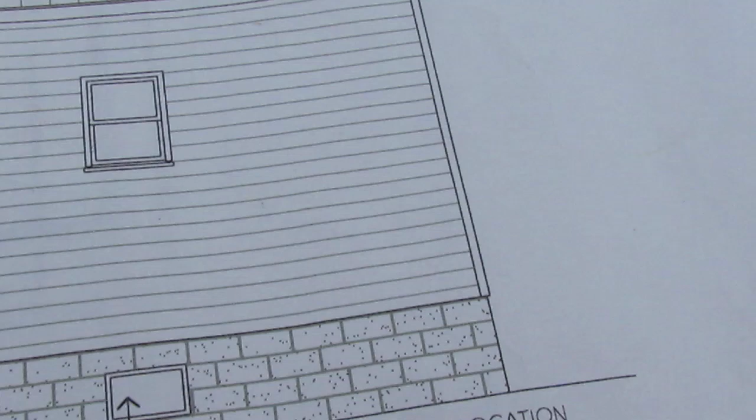Okay, we're going to video this little plan here. This is a house that I just built in Southwest Virginia. It's very simple. So there's your rear. That's what it looks like when you're standing looking at the rear of it.

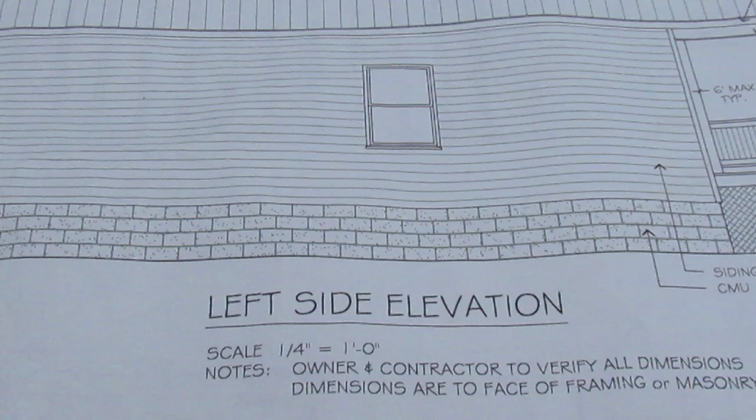Here's what it looks like when you're standing looking at the front of it. There's the left side elevation. If I can pull back and get that all in there. And then you got your right side elevation

right below it. And that's basically what the house is going to look like from the front, rear, sides. Looking at the floor plan here, real simple. Got a bedroom and a bathroom, and then a living room.

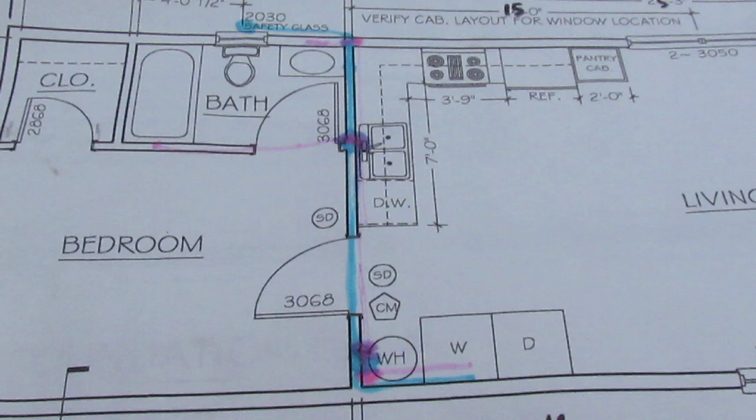This bedroom, I don't know if you can pick up the sizes on that or not, but it's supposed to be 13 foot 5 inches, but I had that wall moved out. So that wall there, that's where the sink is, has actually been moved out a foot. So I have 1 foot bigger on the bathroom and 1 foot bigger on the bedroom. I left the closet dimensions the same. I pulled the other foot off of the bathroom. So now I have a 5 foot by 9 foot bathroom.

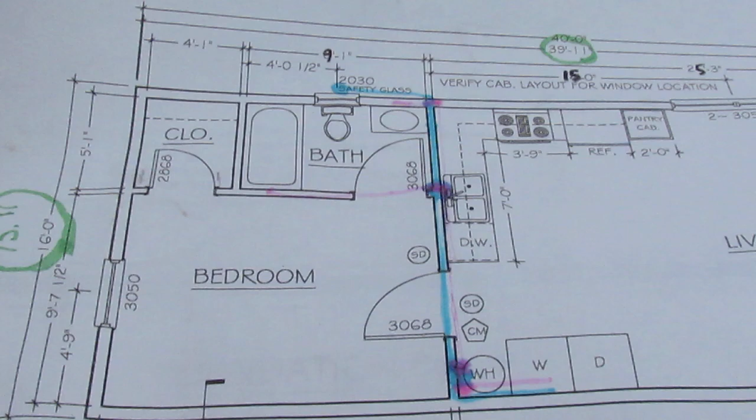Most bathrooms in a home are going to be, you know, that little bathroom that's in the hallway or something. The guest bath, I guess they call it. They're usually about that size. That gives you enough room to fit a 30-inch tub and have enough clearance there for the toilet, and then like a 24-inch vanity. I really wanted like a 32-inch vanity, and I wanted a little bit wider shower pan. So everything works out really good.

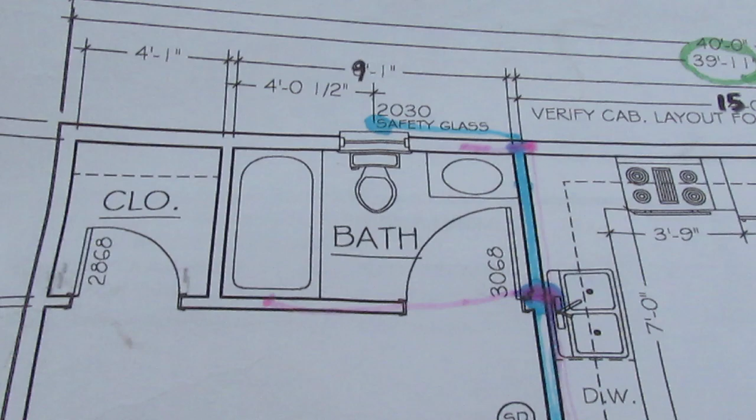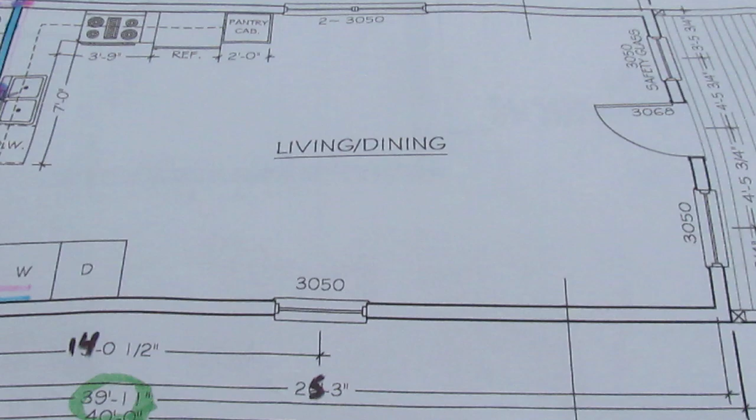You got to keep in mind that your toilet there has to be a certain amount of distance between it and the tub and it and the sink, and that's by code, but you're going to want it anyways because you got to get to your toilet. So everything else pretty much remained the same. You know, you got your regular kitchen there with your stove, and then a hot water heater, washer and dryer, and the rest of it's just a pretty simple living space.

So this thing is 16 feet wide and 40 foot in length with an 8 foot front patio. So the patio just comes right off the front of it, and the roof is very easy. I guess you can kind of see right here. There's the roof. That's how you want a roof, just like that. I believe that's a 5/12 pitch.

That's another thing that's required by code. So it's going to be different in different areas. Some might be steeper, some might be not quite so steep, and some you can pretty much do flat, you know. Depends on where you're at and how much snow you're going to get.

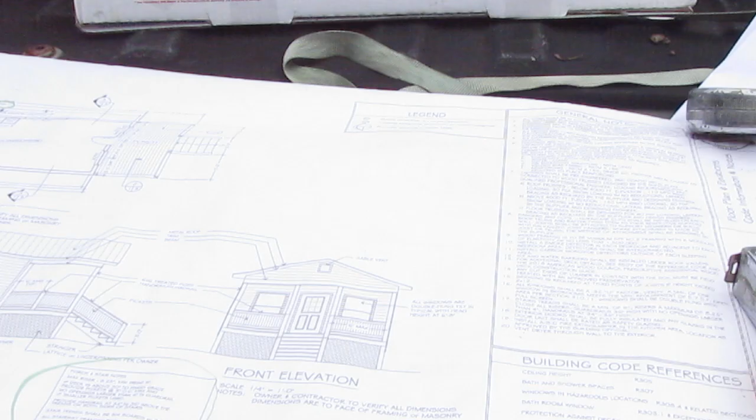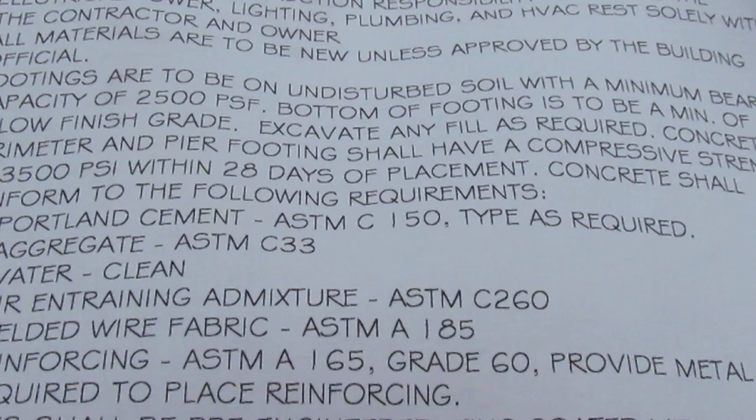So anyways, we're back over here now to the plan. I'm going to read through a couple of these general notes here. All work shall be in compliance with state and local codes. Reference building code is the current edition of the Virginia USBC and referenced 2018 Virginia Residential Code.

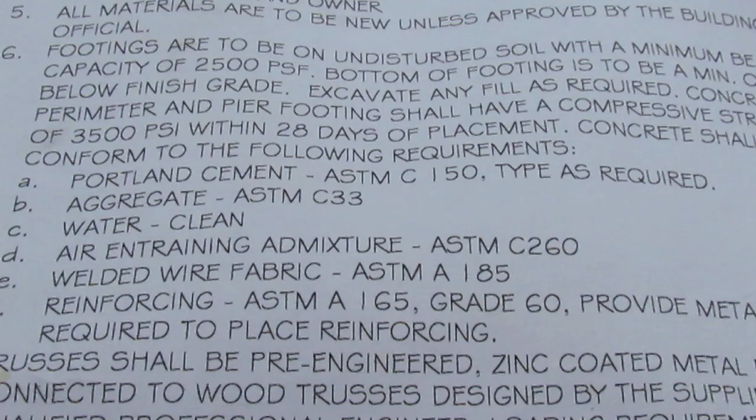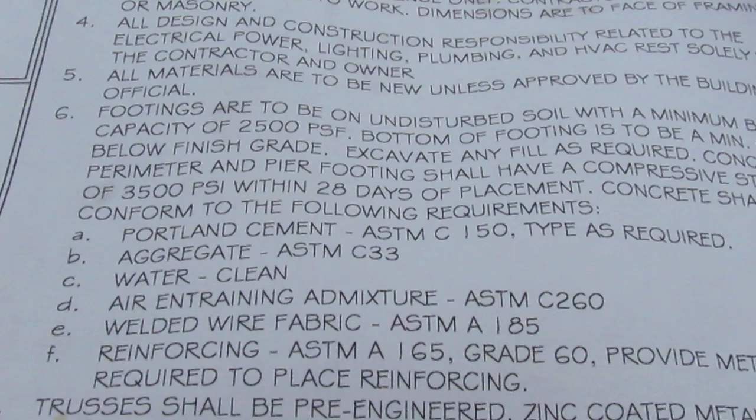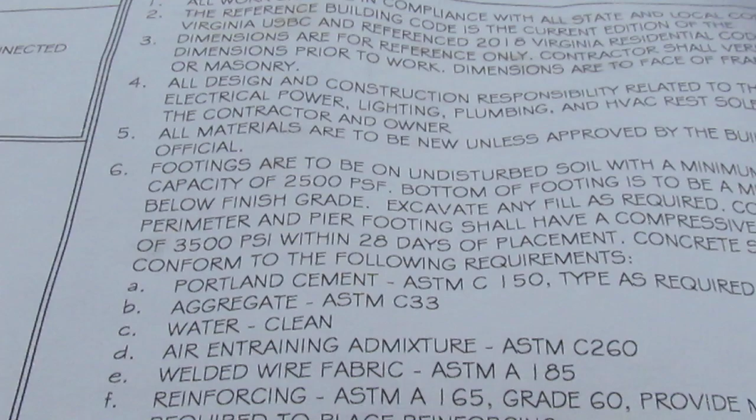Dimensions are for reference only. Contractor shall verify all dimensions prior to work. Dimensions are face of framing or masonry. All design and construction responsibility related to electric power, lighting, plumbing, HVAC, air conditioning, rests solely with the contractor and the owner. So this was an owner build, so I'm pretty much responsible for all that stuff. You know, you have contractors are going to come in and do some of that work for you, hopefully, or you can do it all yourself.

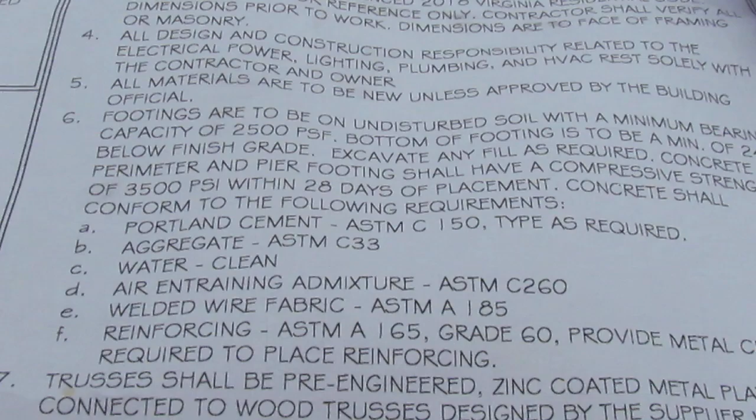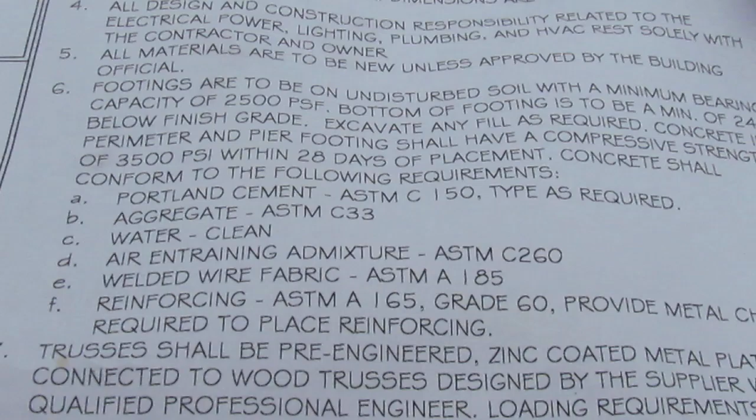All materials are to be new unless approved by the building official. Footings are to be on undisturbed soil with a minimum bearing capacity of 2,500 pounds per square foot. So the bottom of the footing is to be a minimum of 24 inches below finished grade. Excavate any fill as required. Concrete in perimeter and piers shall have a compressive strength of 3,500 psi within 28 days of placement.

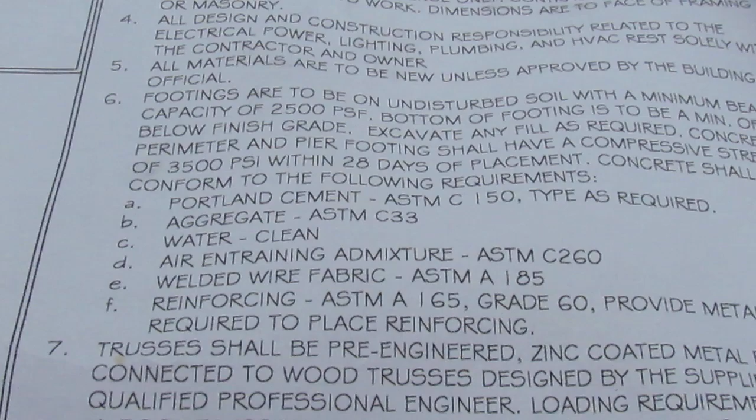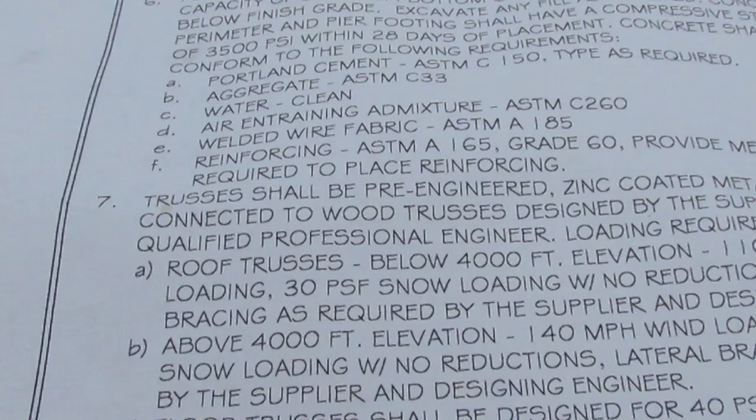Concrete shall conform to the following requirements. So you can see that right there. And then we'll go to trusses. Trusses shall be pre-engineered zinc-coated metal plates connected to wood trusses designed by the supplier with a qualified professional engineer. That means there's engineering on the trusses.

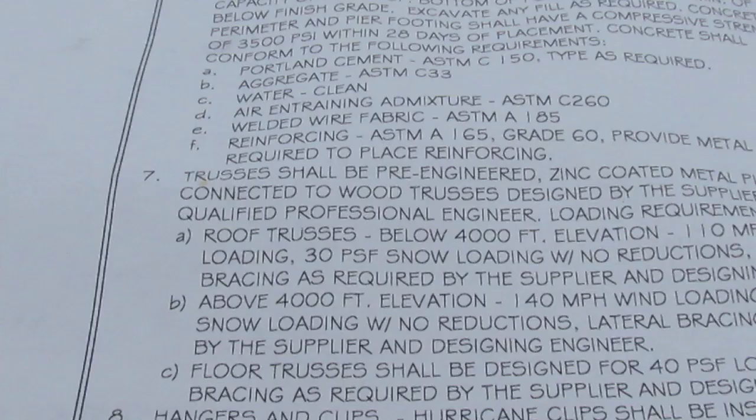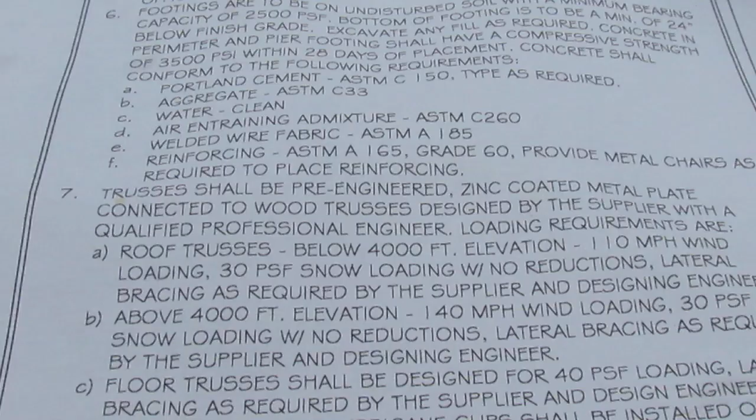So if you go throwing your own trusses up and there's no engineering on them, it probably ain't going to work. Loading requirements are roof trusses below 4,000 foot elevation, 110 mile per hour load, 30 pounds per square foot of snow loading with no reductions, lateral bracing as required by the supplier and designing engineer.

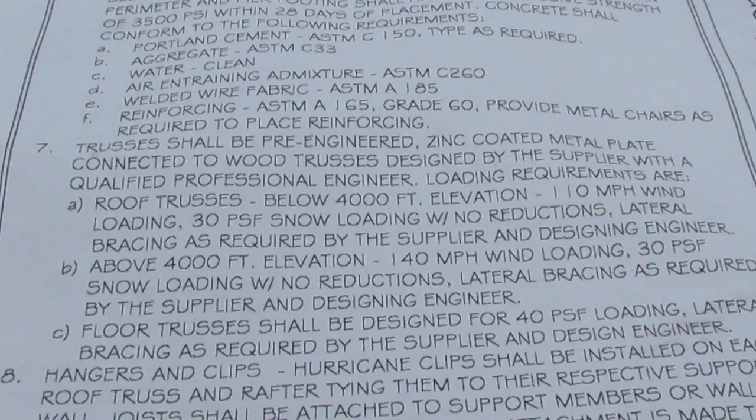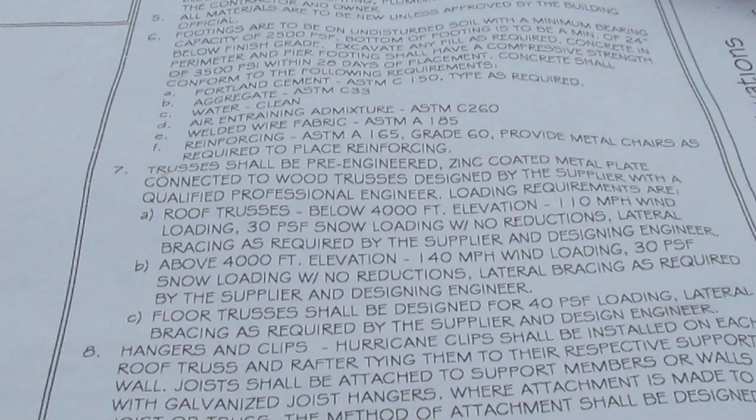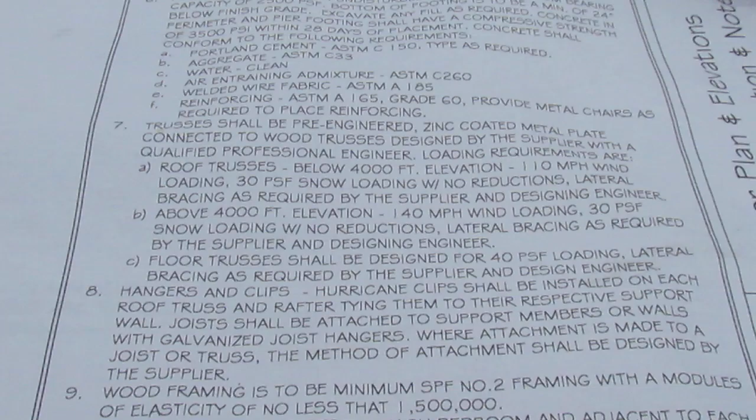Above 4,000 feet, you've got 140 mile per hour wind load, 30 pounds per square foot snow load with no reductions. Floor trusses shall be designed for 40 pounds per square foot loading. Lateral bracing as required by the supplier and design engineer. Hangers and clips, hurricane clips shall be installed on each roof truss.

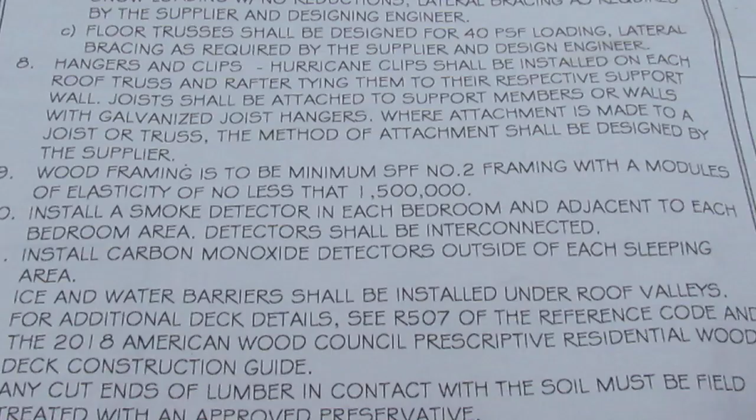There's just a bunch of stuff in there. I'm tired of reading it. I'll try to see if you guys can read it. Hopefully, I mean, I'm not saying you can't read, but hopefully you'll be able to read what I'm getting at there. Interesting stuff in there. You know, you have to do things like this.

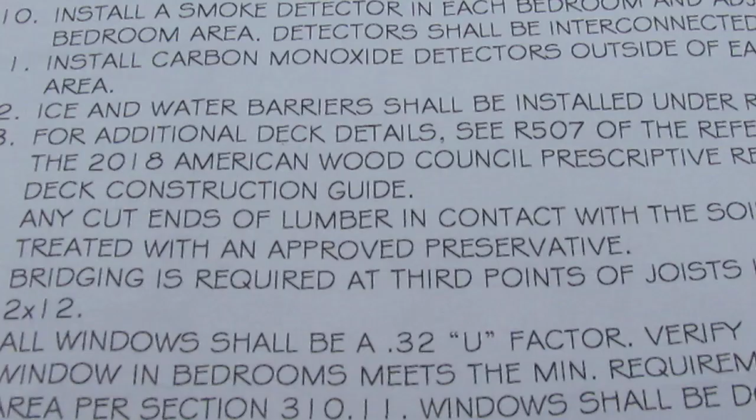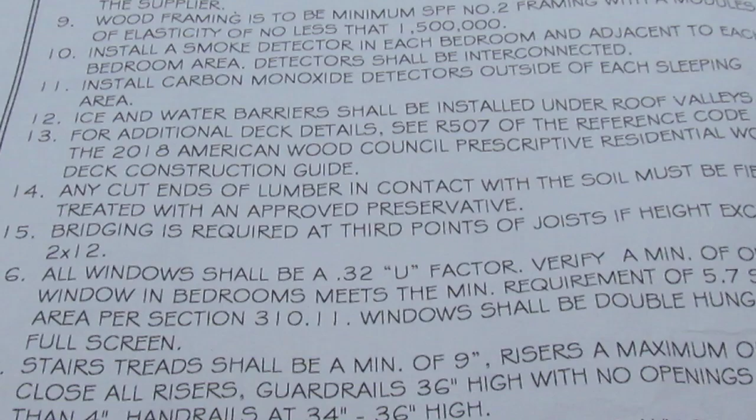Ice and water barrier shall be installed under roof valleys, and it's also going to be required on the outside for ice and water shield in case you get any ice built up. So anyways, that's what you're looking at.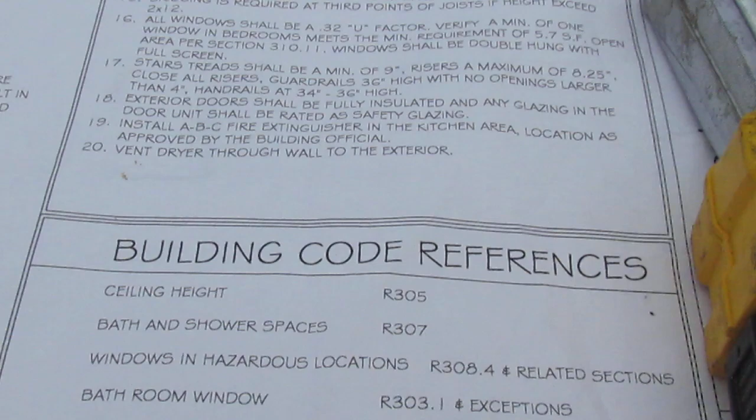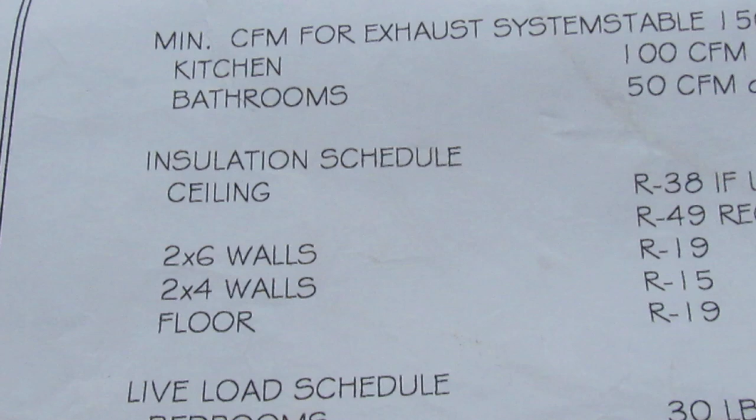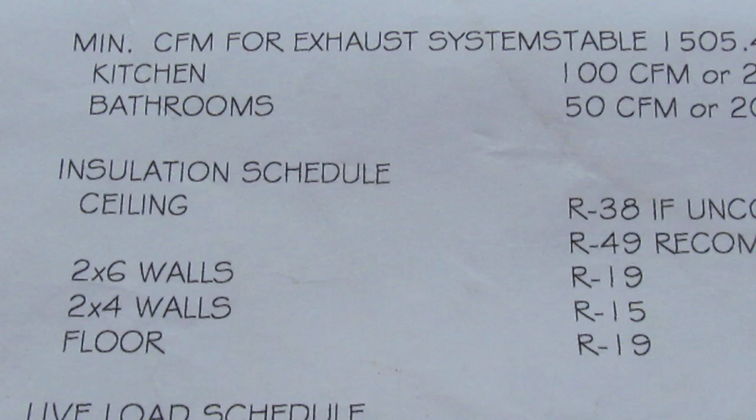So we got 2x6 walls, and this is up to code here. With 2x6 walls you can get R19, but not with a 2x4 wall, so you're going to have to use 2x6s by code. The 2x4 walls would be R15, so you don't use 2x4 because you can't get... well, I don't know now.

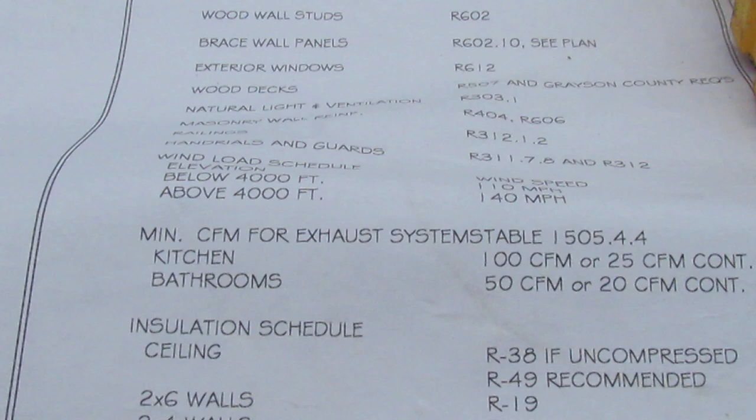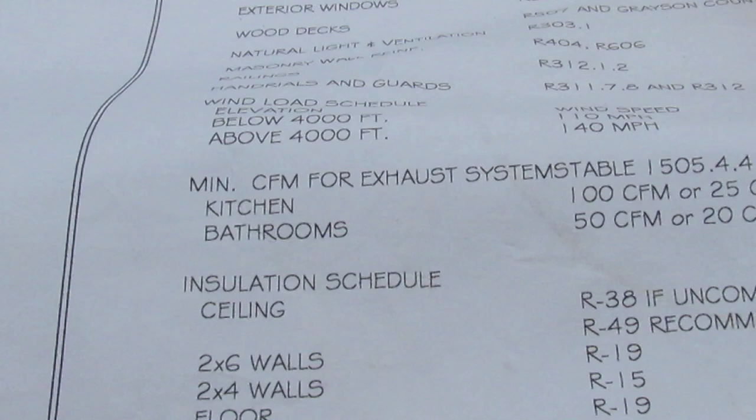It's interesting. With 2x4 walls, I don't believe you can build out of 2x4s anymore, but it says 2x4 walls R15. I thought by code you have to do 19 or 21 in this area. So anyways, I did 2x6 walls and R21. Floor I did R21, 19 and 21. There's no difference in price.

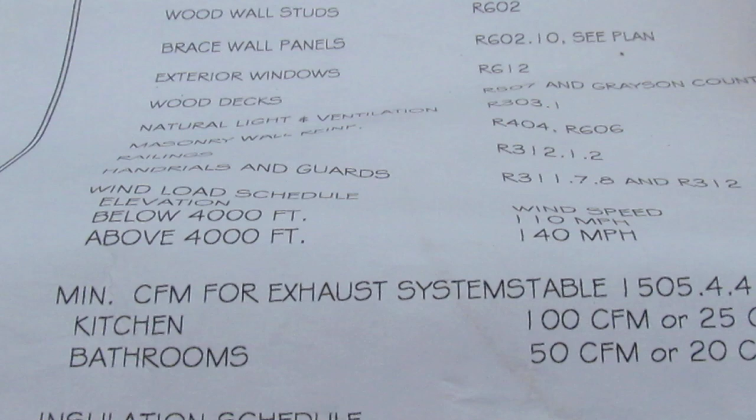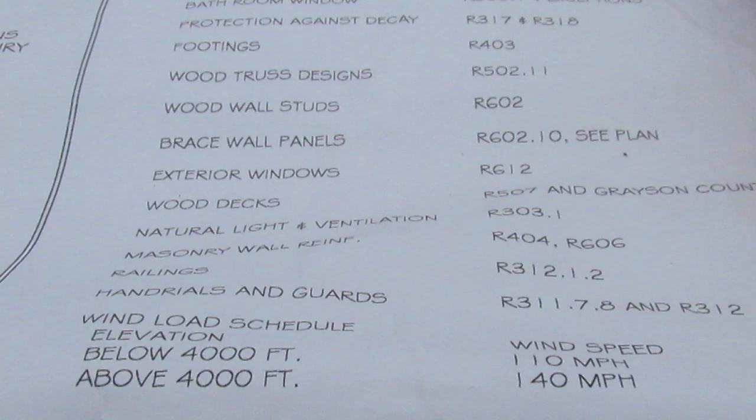Got a bathroom vent, they call it the fart fan, but it's not really — I mean it'll work for that, but it's actually to clean out the humidity that builds up. You take a hot shower in there, there's a lot of humid air, and you need to get that humid air out of there. So that's what that fan is for in the roof — it's actually to take the condensation out of the bathroom to prevent mold and mildew and stuff like that from growing. So this is just the first page.

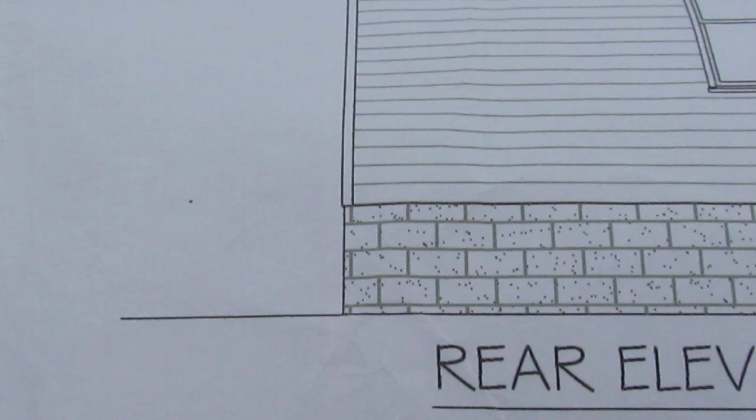There's, you know, 3 pages to it. I can't get to all of them right now, but it kind of gives you an idea. You got some riser notes here on the porch and stairs. The maximum riser distance is 8.25 inches, so on these stringers here, it has to be 8.25 inches in height on the stairs for code.

The reason being is because that's about what all stairs are, and people get used to lifting their leg that high to go upstairs. If you make them higher than that or lower than that, it actually really throws you off. So you want to stay right there at about 8 inches, maybe 7 3/4. They're going to let you know.

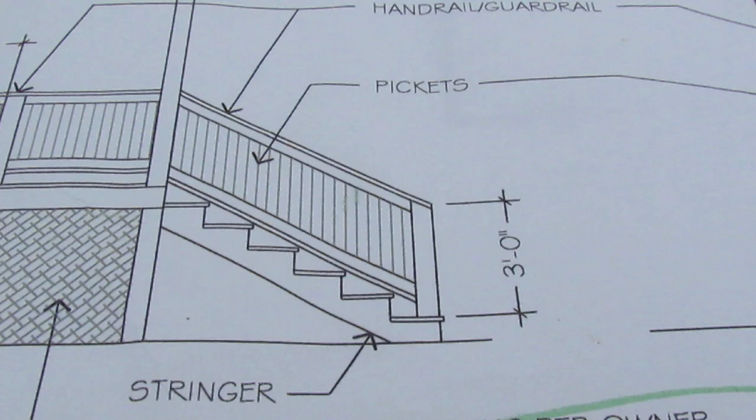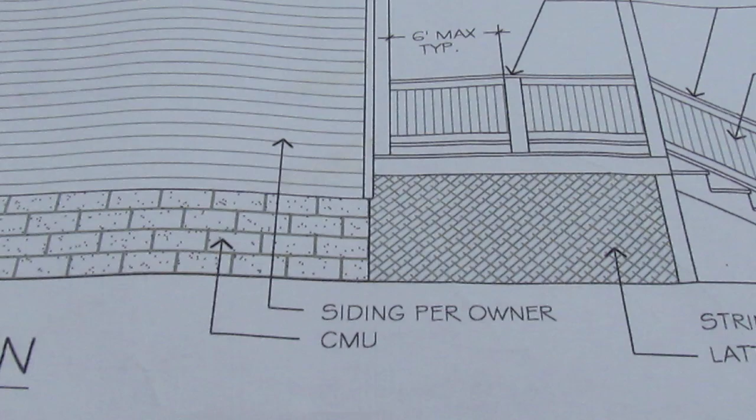We did a metal roof. You know, we were going to do vinyl siding — probably says on there somewhere. No, it says here siding per owner, so right there. Ended up doing metal siding. I was going to do vinyl siding — that would have been a big mistake. Big mistake, I wouldn't recommend that.

And you got your little crawl space underneath here, because this is a block foundation, so your plumbing and everything's underneath there. You got to have some access, you know, when you get it all framed up. I had to crawl through that hole — it's a little bigger than that. I'm a little fatter than average, so I had to make that hole just a little bit bigger.

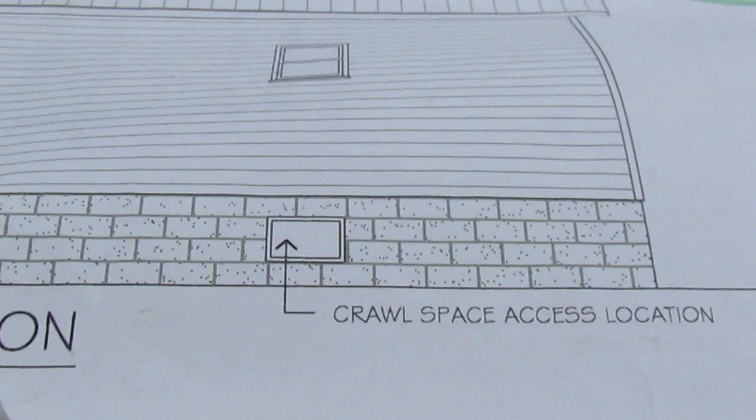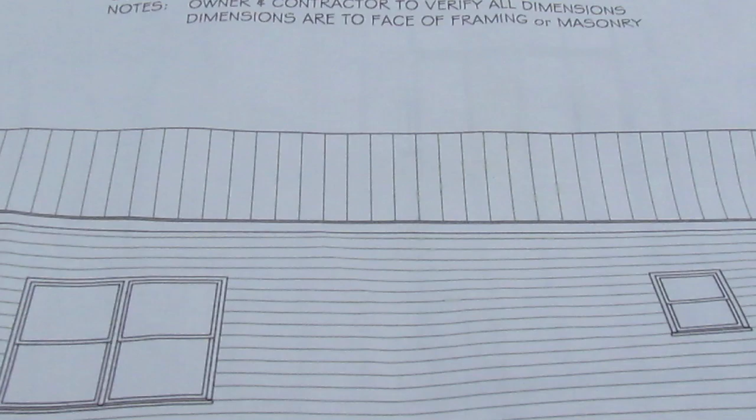So make your — I think the thing was 24 by 24, anyways make it bigger than that, because you're going to have to go in there and visit the underneath of your house every once in a while. So that's how you get underneath there. Alright, so that's what we're looking at. There's the dimensions and stuff.

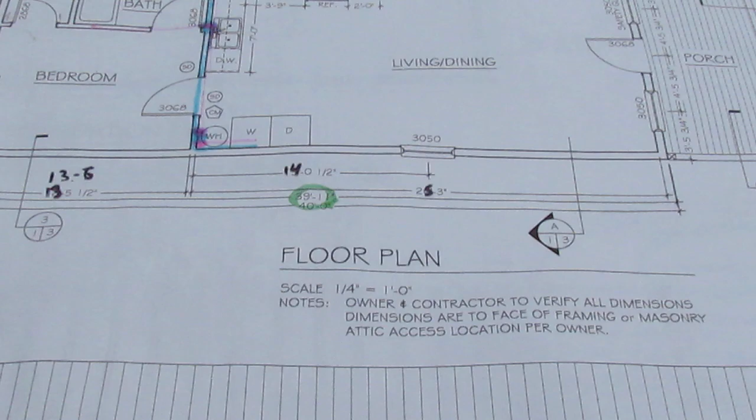It's an easy to build, easy to understand floor plan. It's going to be cheap to build — not going to be like real cheap anymore because of the price of everything, but it's nice and affordable. So far our electric bill, we got a mini split on it, has been about $115 a month on average, probably for summer and winter. Sometimes it's 70, sometimes it's 150, but that's been real nice.

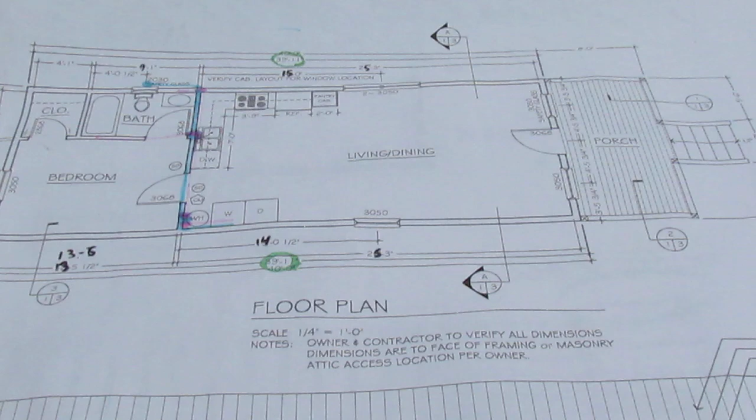Taxes are fairly cheap. We got 3.2 acres and a house on it, and the real estate taxes are right about $500 bucks, I think. So something to think about when you're building is what it's going to cost you in the long run to heat and cool and pay property taxes. All right, I gotta go.